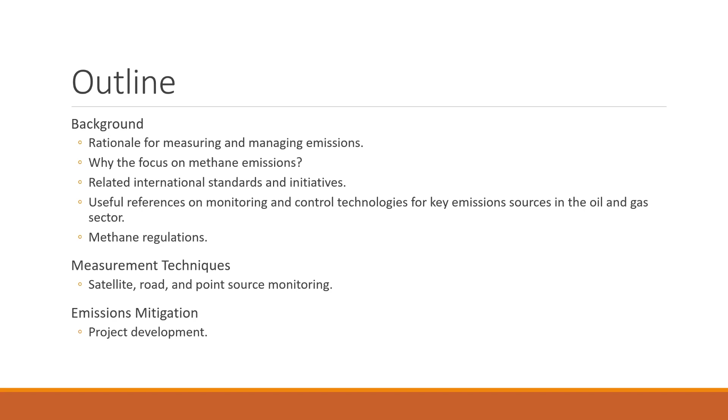So in terms of why people would want to measure and mitigate greenhouse gas emissions, I think the reasons depend on your circumstances, whether you're industry or government. Also, they depend on where you are in the evolution of trying to respond to climate change issues and the NDCs that your particular jurisdiction is committed to.

Historically, a lot of industry saw doing environmental work as being the cost of doing business. Often they simply looked at doing the regulatory minimum. But what's changing now is that the regulations are becoming more stringent, especially with respect to greenhouse gas emissions. And there's a lot more clear drivers as to why you would potentially want to go beyond doing simply the regulatory minimum.

One of the first things that at least some of the more proactive and larger companies like to understand is what are their risks. So prior to new regulations coming in, a lot of them historically have sponsored studies to look at where their emissions are occurring, what some of the opportunities might be to address those emissions, and how they see that as being a risk to their operation.

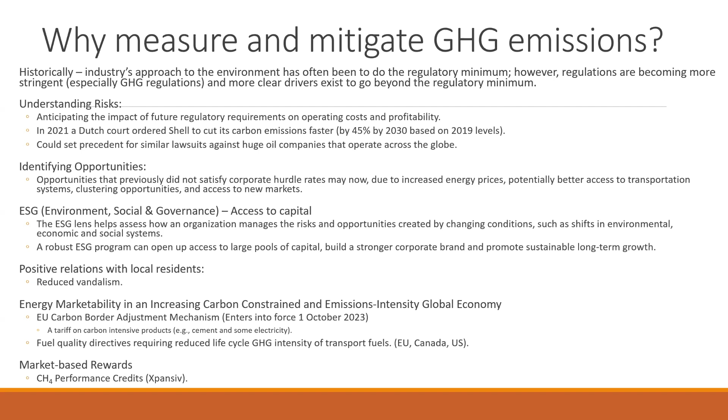Why the focus on methane? If you've been following greenhouse gas emissions, you'll see there's a huge focus on trying to reduce methane right now. It's not that CO2 reductions aren't important—anything cost effective that provides material reductions in greenhouse gas emissions, whether methane, CO2, or nitrous oxide, is important. But there's particular value in focusing on methane.

Methane is a powerful, short-lived climate pollutant. Its lifetime in the atmosphere is 12.4 years, based on the latest data published in the IPCC Fifth Assessment Report. This lifetime figure has varied over the years, and climatologists and researchers are spending a reasonable amount of time studying it. Initial values from a few years ago were more like 11 years, but now it's up to 12.4, which is why the global warming potential for methane has been increasing from assessment report to assessment report.

Methane is responsible for approximately 30% of the global temperature rise to date. While it's much less abundant in the atmosphere than CO2, on a mass basis it's 28 times more potent than CO2 over a 100-year time horizon.

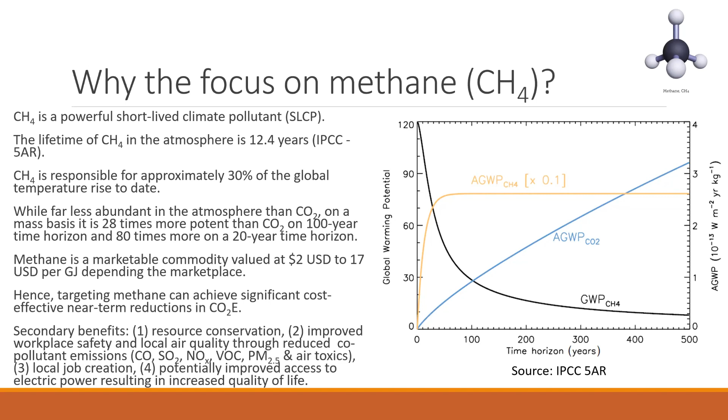So what are some of the related standards and initiatives that exist for methane? Right now, there's a strong political move to get countries to sign on to the global methane pledge. This pledge commits countries to move towards using higher tier IPCC good practice inventory methodologies, and to take voluntary actions contributing to a collective effort to reduce global methane emissions by at least 30% from 2020 levels by 2030. Reducing methane emissions from oil and gas operations is seen as among the most cost-effective and impactful actions governments can take to achieve global climate goals.

The Global Methane Pledge provides policy toolkits to the signatories. It provides access to selected technical resources, including relevant technical reports, best practice guides, and methane estimation tools. It also provides links to related initiatives such as the Global Methane Initiative, the Global Gas Flaring Reduction Partnership, and the Climate and Clean Air Coalition.

Currently, 150 countries have joined the Global Methane Pledge, including Nigeria. There are approximately 195 countries in the world, so that's 75% of jurisdictions signed up. Most of those that haven't joined are countries that don't have much of an oil and gas industry, so they don't have the same opportunities. But it's impressive that 150 countries have signed up.

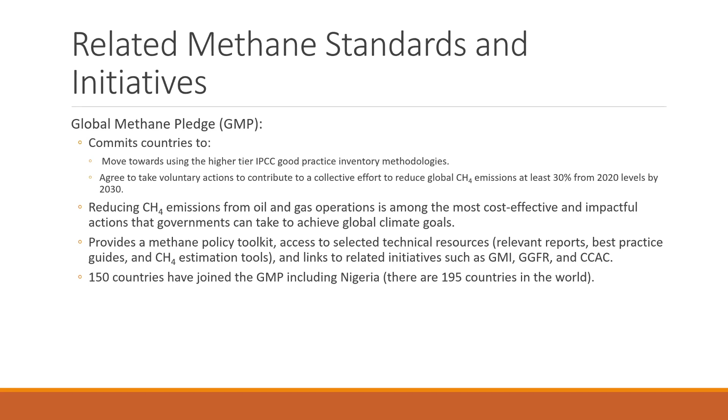Looking at international standards that might apply, the key standard for quantifying methane emissions at a project level, a company level, or a national level is ISO standard 14064. This standard has three parts.

The first part covers how to conduct a greenhouse gas inventory, how you establish your boundaries, what you include in that, and what are the direct and indirect contributors.

It also provides the procedures you would follow to establish project-based reporting of emission reductions, addressing issues like project leakage or indirect emission contributions that might occur outside of the project boundary.

It also provides a standardized process for verification of a greenhouse gas inventory. Anyone involved in developing inventories or greenhouse gas projects, or verifying these sorts of things, should have gone through some training on ISO 14064.

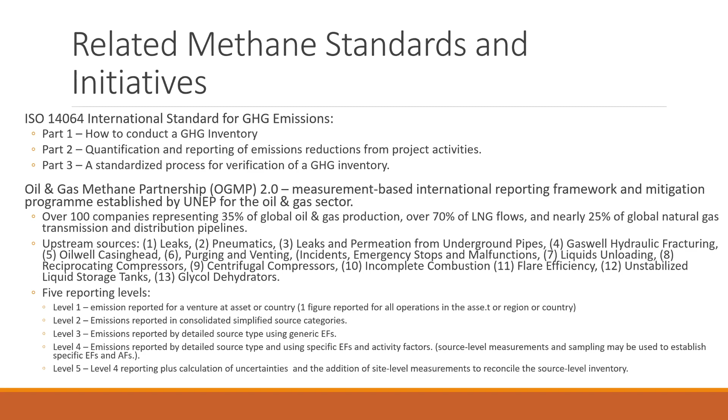It's not specific about what you need to use to do the verifying measurements, but it could be road-based monitoring, aerial surveys, or satellite-based measurements.

There's also, through the Climate and Clean Air Coalition, back in 2017, they took a lot of the information that was available from the US EPA's Gas Star program on lessons learned and successful mitigation strategies for different types of control options or emission sources in the oil and gas sector, and they put together a 9-volume series that reviewed how to measure and mitigate those emissions. They're still relevant documents.

They're still available on the website. You have to dig a little bit to find them, but I captured a screen image yesterday from the CCAC website that shows that if you put in at least the title of the report, you can find these reports on their system. As I indicated, they were all published in 2017, so if you use their filtering systems, you can eventually get access to those documents.

Other useful information, other sources that would apply that aren't accounted for in this 9-volume set, would be unit, facility, and pipeline level blowdowns that occur, and other forms of process venting, which would potentially include the release of CO2 emissions removed from produced gas using a gas sweetening unit, as Sunday discussed in his presentation.

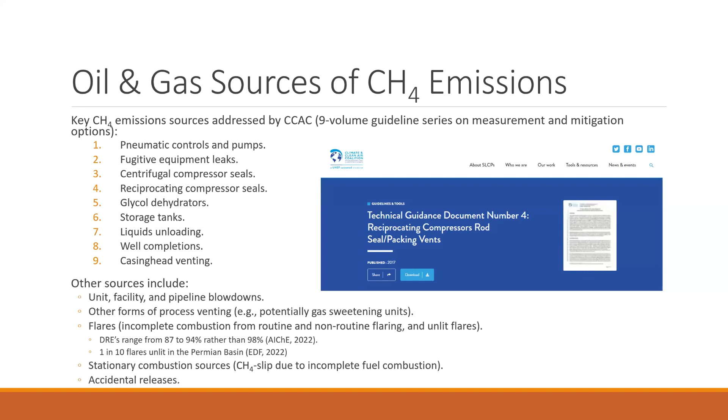Sometimes it's interesting to see what's in the public and commercial domain with respect to emissions, whether you're an operator for your facilities or a country for your jurisdiction. Currently, IEA, the International Energy Agency, has a tool called Methane Tracker. It's something you can access on the internet to see what they estimate emissions to be in any jurisdiction, focusing on methane emissions.

For Nigeria, they estimated that the methane emissions for the upstream oil and gas sector ranged between 1.83 and 4.79 megatons per year, and the contributions were mostly from venting.

As well, the GGFR provides a website that allows you to access information on active flares that exist in countries around the world. This is information they've developed from satellite monitoring and correlations used to convert the satellite data into estimated flaring rates, and that information is publicly available.

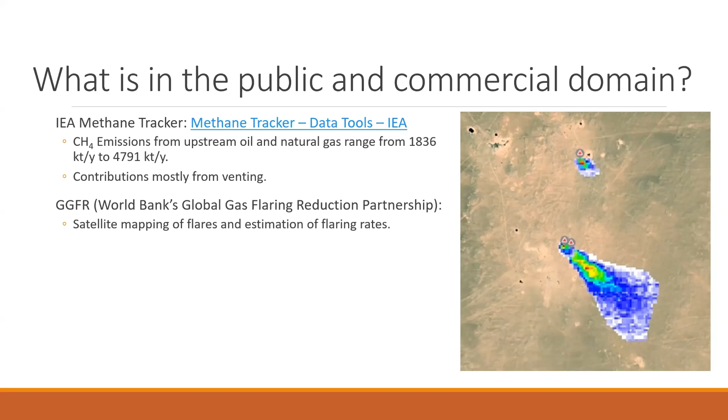If you go back to the IEA website, not only do they give you total emission estimates for jurisdictions, but they also break that down by where those emissions are coming from—what sector, and if you look at the oil and gas sector, it breaks it down even further in terms of what the sources were.

And it provides a comparison of what they're estimating versus what you're seeing in other reported inventories for a particular jurisdiction. In this case, they're comparing the emissions they've assessed to values published by the UNFCCC, which would be the National Communications by Nigeria to the UNFCCC.

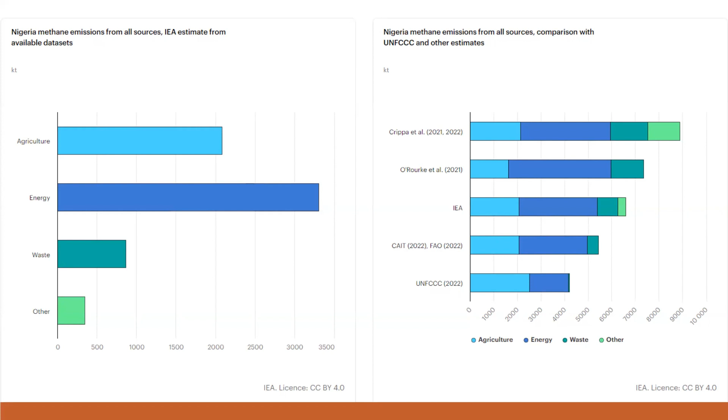It's also showing estimates developed by various research groups, and their numbers are somewhere in the middle. Our experience is quite limited because we haven't done it in a lot of countries, but where we have, my sense is that the IEA numbers, even though they're kind of middle of the road here, still tend to be conservative and understate what the emissions would typically be in a jurisdiction. But again, that's just initial observations based on a very limited data set.

And again, on the right-hand side, you see similar estimates from different groups on what those emission contributions would be, depending on whose estimates you look at.

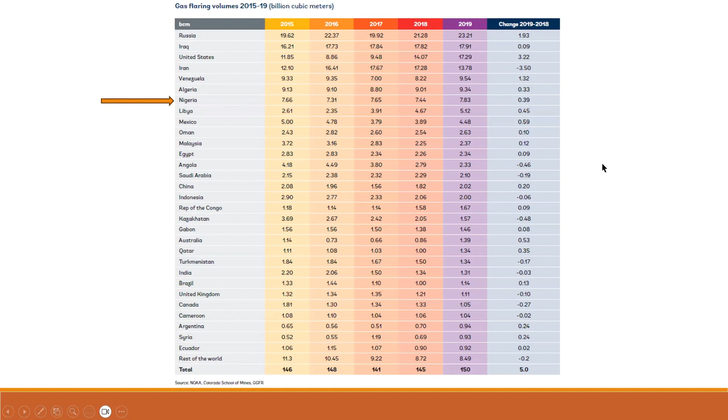IEA also provides a marginal abatement cost curve, looking at different technologies that can be applied in the oil and gas sector. These would be essentially all the technologies that the CCAC, the Global Methane Pledge, and OGMP talk about. These types of curves are really hard to look at because they're really dependent on your circumstances, what technologies are going to be cost effective for you and which ones aren't, and what the penetration potential of those technologies will be in your sector.

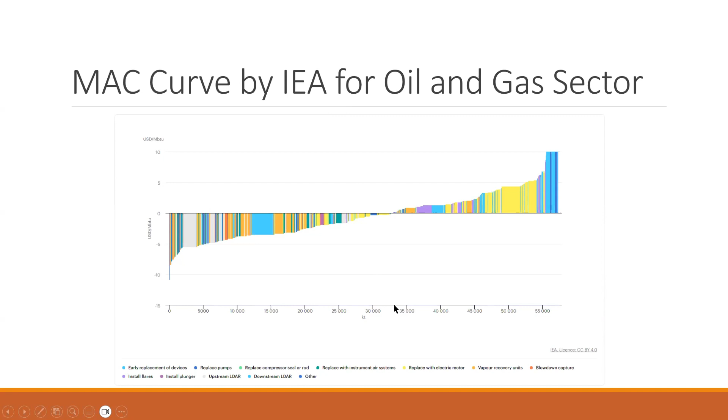But this is a generic marginal abatement cost curve that is intended to reflect what they believe is the global circumstance. It shows that there are a reasonable number of opportunities that, if they've got a negative value, are cost effective to implement, so you can get quite a large reduction in emissions by simply doing what is cost effective or has zero cost to reduce those emissions. That would be basically taking you to here. If you come down, that would give you a 30 megaton reduction in methane emissions.

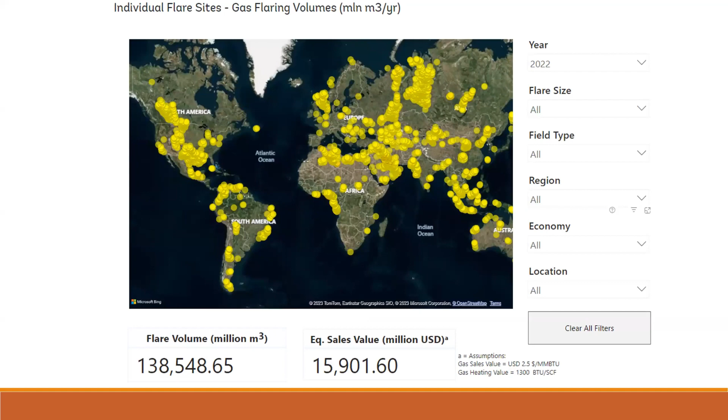This is the kind of data that's available from the World Bank's GGFR, showing the location of flares around the world, and you can zoom in on a particular territory. So I've done that for Nigeria. Here you can see where they're showing flares, some of them offshore, some of them onshore, and you can actually get a listing of the emission rates or the flaring rates for each of these flares from their website as well.

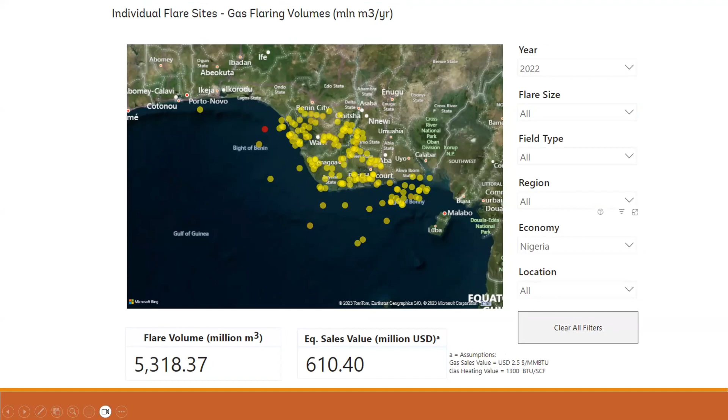Methane regulations.

The methane regulations in Canada, as I mentioned earlier, are currently, I think, the only set of regulations that have been fully put into force, and are what would probably be deemed fairly onerous requirements for industry. They're targeting to achieve a 40 to 45% reduction in methane emissions from the oil and gas sector in Canada relative to 2012 levels by the year 2025. Those requirements first came into effect in January of 2020 and have been phased in since then, with the last remaining requirements becoming effective January 1st of this year.

Based on what they're seeing in terms of how industries have responded to this, and the reductions that they're able to verify are occurring, they're wanting to further reduce those, or implement even more stringent requirements. So sometime this year they're coming out with a draft set of regulations, and those new regulations are expected to target a 75% reduction below 2012 values by the year 2030.

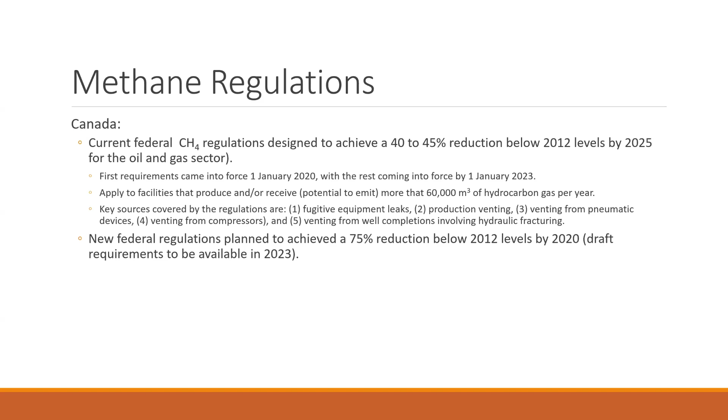Anyways, I will show you what those requirements actually look like. For fugitive equipment leaks, they're requiring that companies do an LDAR survey at their facilities 3 times a year. You might ask, why 3 times, why not just quarterly? The reason is that in Canada during the wintertime, with the cold temperatures, it's hard to use some of the leak detection equipment. It just simply doesn't perform that well. You need good contrast, and if you're using optical gas imaging cameras, which most people are using these days, they simply don't work that well in the wintertime.

So you don't get good detection capabilities, and some of the facilities are actually harder to access in the wintertime than they would be in the summertime.

Interestingly, I see some of the same issues in tropical environments. There's usually a rainy season with a lot of cloud cover and rainy days, and during that time it's equally challenging if you're using an OGI camera. They need proper contrast; the best time to use them is on a bright sunny day, and without that it can be very difficult to see leaks.

I've used a camera in those types of circumstances, and it's quite dramatic. You can be walking around a piece of equipment and not see anything, and then suddenly there's something in the background that provides that contrast. For a very short part of your circling of that source, there's a place where you can actually see the emissions. Otherwise, you're totally blind to it.

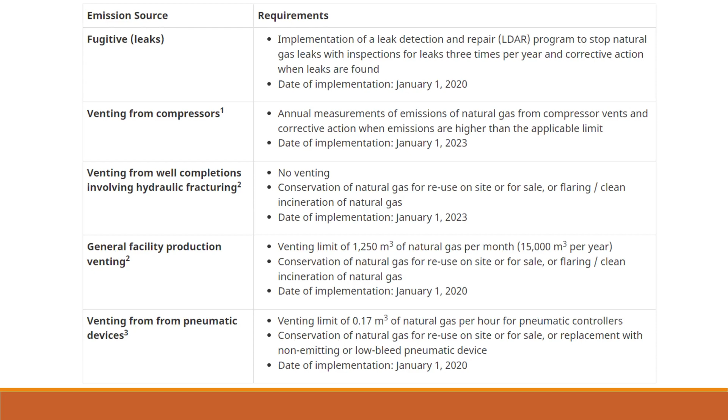There are also requirements to limit venting from pneumatic devices. They've got a limit of 0.17 cubic meters of natural gas per hour for pneumatic controllers. A lot of companies have converted their pneumatic controllers from high bleed to low bleed or no bleed, or else put in air compressors to provide compressed air as a supply medium instead of using natural gas.

Measurement techniques. This basically summarizes the types of approaches that can be used. Point source measurements are where you go in and directly perform a measurement on the source. This is useful information because ultimately, to address an opportunity, you need to understand what the cause is and what the actual emissions from that source are, to drive potential economics on it.

Aerial surveys can be done to help identify high emitting facilities where you might want to target your efforts, but they can also be used to zero in on hotspots at a particular facility if it's a larger site. These can be time consuming and expensive to conduct. A road survey is where you have a vehicle mounted monitoring system; you drive downwind of the facility and use that information to get a snapshot of what the emissions need to be.

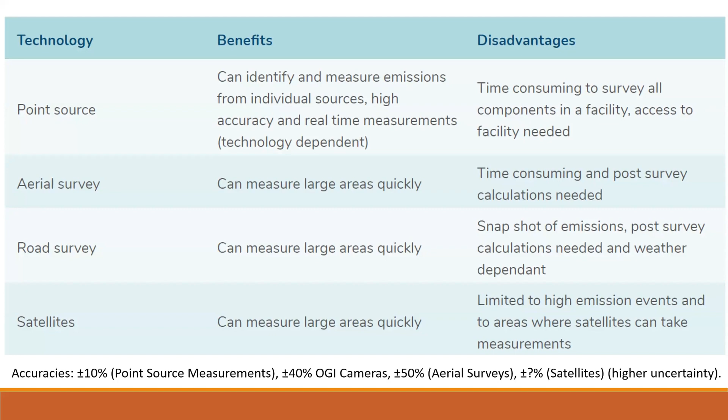In terms of satellite monitoring, there are methane-specific satellites that can track methane on a global scale but can't detect small-scale sources, which are responsible for a lot of total methane emissions from the oil and gas sector. Others can provide excellent data for known sites but can't see beyond small areas. Existing satellites don't provide measurements over equatorial regions or northern areas, or are very challenged, at least for offshore operations, and are affected by cloud cover.

Sentinel-5P is a methane satellite launched by the European Space Agency. It has a resolution of 5 kilometers by 7 kilometers. The data are publicly available - you can download it and graph it to look at where hotspots are across the country.

GHGSat offers a resolution of 50 meters by 50 meters, much more resolved. The Italian space agency launched a satellite with even better resolution, 30 meters by 30 meters. NASA has a GeoCarb satellite that tracks sources and movements of methane around the globe. The Environmental Defense Fund is proposing to launch a satellite in early 2024, which it says will be state of the art at the time it goes up, and will be able to identify and quantify emissions from sources larger than 500 kilograms per hour.

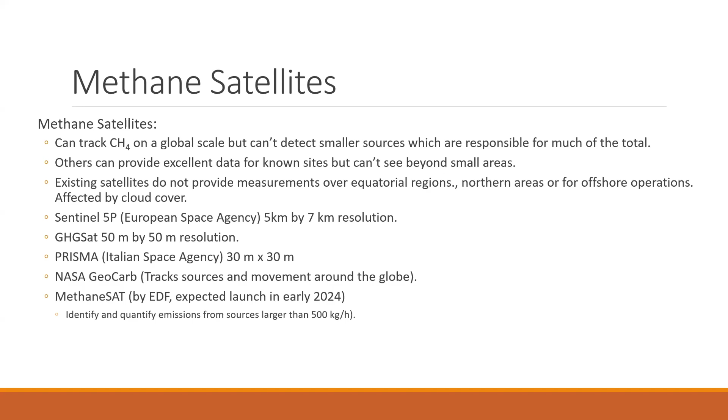The primary capabilities are the ability to detect and quantify methane emissions from point, line, area, and volume sources. Based on controlled releases we've done, it works quite well with reasonable wind conditions. We're seeing accuracies typically in the range of plus or minus 25% under stable wind conditions and speeds of 2 meters per second or greater. If the wind meanders, it affects your ability to properly geolocate the origin of the source, and if you get gusting winds, it affects your ability to get accurate quantification of that emission rate.

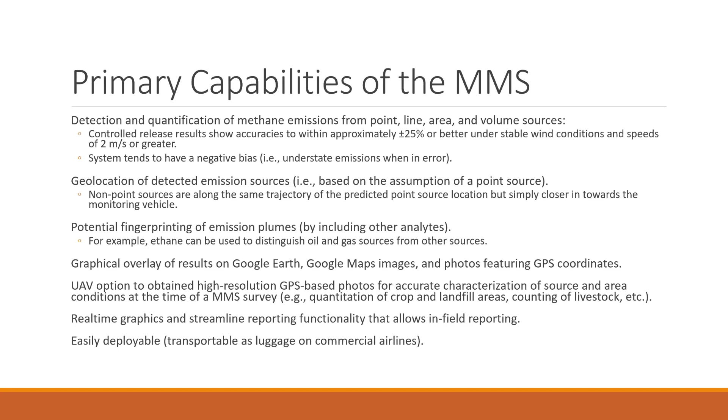And it provides real-time graphics and streamline reporting that allow you to do reporting in the field, and it's easily deployable. Everything breaks down into several cases of luggage that can be taken on a commercial airline and flown to different parts of the country or to different parts of the world.

The advantages are that it provides real-time monitoring and in-field data analysis. It's able to cost effectively and quickly screen many facilities or sources and rank order them based on their assessed emissions. It detects emissions that on-site screening methods miss.

In a recent study, we worked in parallel with a team that went on site and did direct measurements using optical gas imaging cameras to detect leaks. What we found was the best strategy was to screen the facility first with the mobile monitoring system to identify the hotspots, and then send the teams in armed with the knowledge of where the sources appear to be located, so they could pinpoint the source, determine exactly what it was, and do their direct measurements on it where that was possible.

It also had the advantage that it was able to quantify emissions from sources that the camera and direct measurement techniques simply couldn't quantify. So we didn't miss anything - we always had complete quantification of the emissions from a facility.

As well, it ties in nicely with the OGMP 2.0 level 5 methane reporting verifications. It actually provides comparable, or in some cases even better, sensitivity than other methods can - certainly better sensitivity than aerial techniques would. But even with the OGI camera, there were cases where we could see emissions that the camera couldn't see using its viewing capabilities.

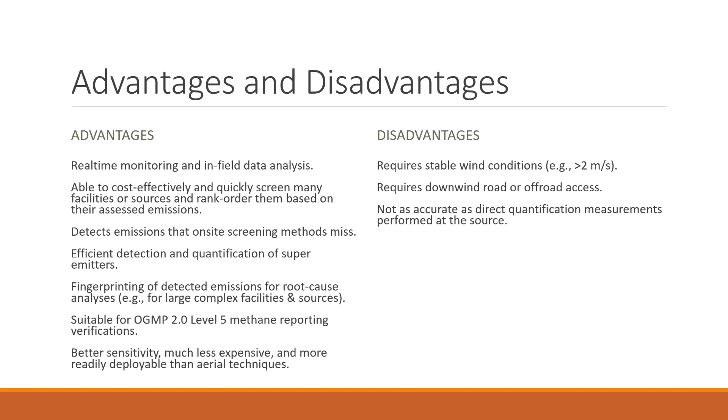The disadvantages are, of course, we need wind, and not just wind but stable wind conditions to get good results. But even with results that suffer from uncertainties because of gusting, we still have the ability to help pinpoint where the emissions are and determine where the hotspots are, which helps guide the ground teams that would be used. It's not as accurate as direct measurement techniques, and it does require drivable downwind terrain - it doesn't necessarily have to be a road, but it needs to be at least firm ground that you can drive on, allowing you to get on the downwind side of the facility.

The types of sectors we've targeted using the monitoring system have included oil and gas facilities, both upstream and some fairly large gas processing and LNG facilities. We've also looked at refineries and petrochemical facilities. We've used it in urban areas to identify leakage from gas distribution systems, and driven through light industrial and commercial areas to identify leakages there.

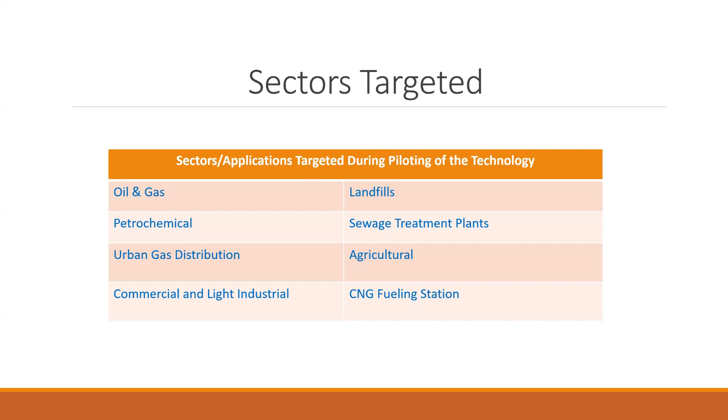We've used it to quantify emissions from landfills, sewage treatment plants, even agricultural applications looking at enteric emissions from livestock. We haven't had an application yet to use it on something like rice paddies or crops that would be methane intensive, but we're in discussions with Agriculture Canada to do that kind of testing. We've also used it to quantify methane emissions from CNG fueling stations.

What typically are the biggest opportunities that we see? Certainly in North America, where there's been regulations to try and deal with things like routine venting, we're seeing large amounts of emissions tends to be from flares, especially unlit flares, but also venting of flash gas from production storage tanks - both produced oil tanks and produced water storage tanks. The water tanks have some hydrocarbon carryover that promotes or is a source of flashing that can be material, especially where you've got large amounts of produced water. And fugitive equipment leaks still remain a fairly noteworthy source and continue to be an area worth targeting.

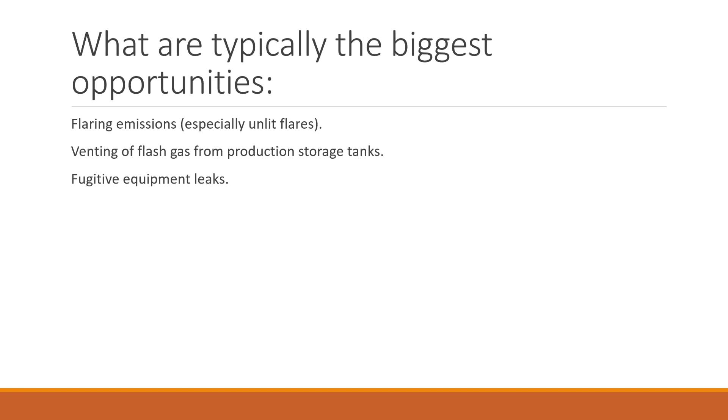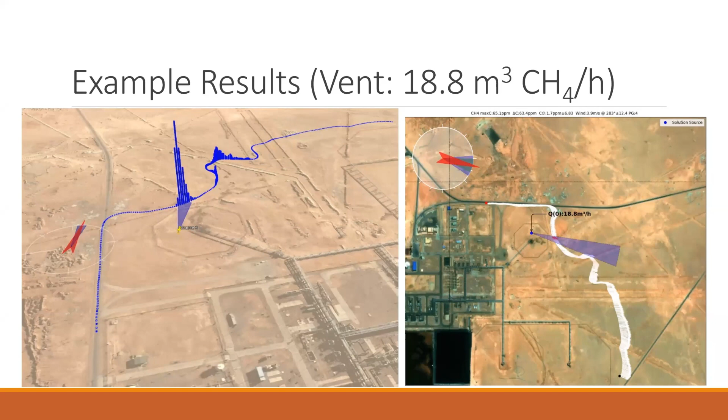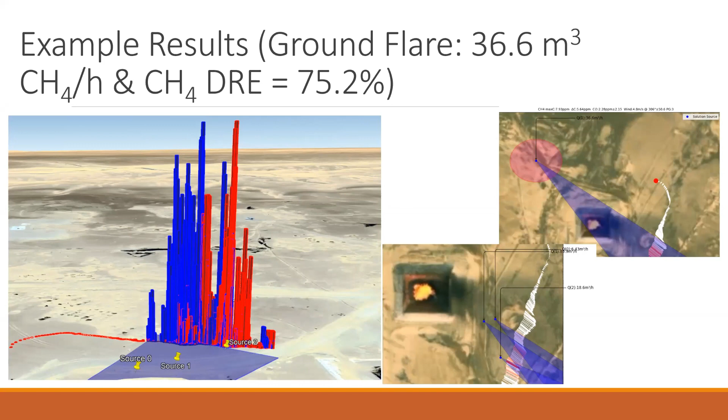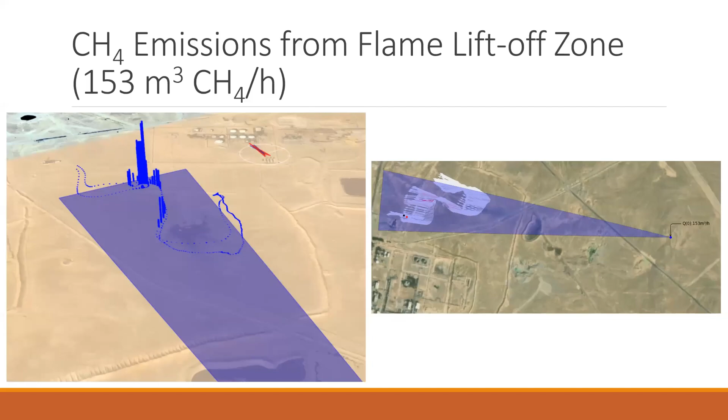Point source measurements - most of these are really directed at fugitive equipment leaks.

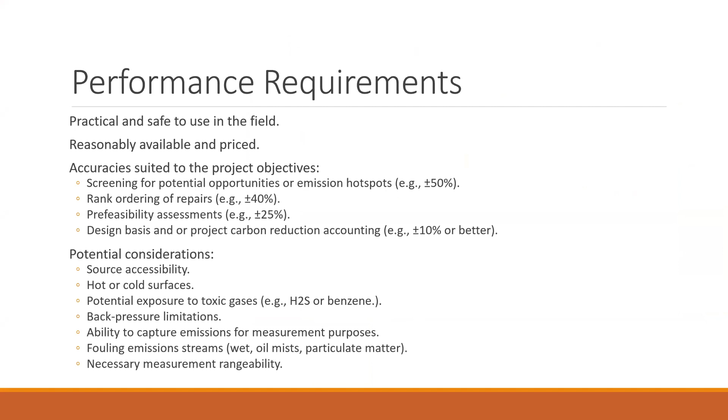I know I'm running out of time here, so I'm going to skip over some of the detail and just show you the basic technique. Method 21 does allow you to use soap solutions or the bubble test to detect leaks, and it even suggests a means where, based on the rate of bubble formation and the size of the bubbles, you can quantify the leak rate. Method 21 is an approach developed by the US EPA, originally for application at refineries and chemical plants to detect VOC leakage, but it's also used for detecting methane leakage at upstream oil and gas facilities.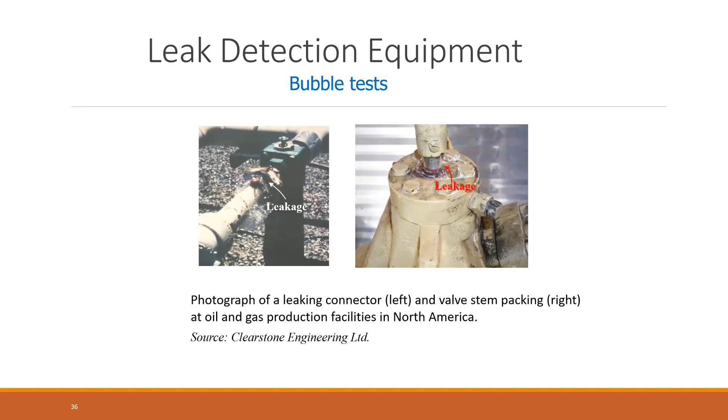And it's the most labor intensive. It involves someone going around and actually checking each individual component to look for leakage. So if you spray it with the soap solution and it bubbles, then you know there's a leak. If it doesn't, then there isn't a leak.

There's also the ability to use a handheld gas detector to do the same measurements. Here you take your probe and pass it over the potential leakage points, and there's a specific procedure in method 21 that tells you how to use that. And you record a ppm reading, and a lot of the regulations that define what is a leak from a regulatory perspective define it in terms of a ppm screening value.

It's a crude indicator of leakage, but it's a method that can be used to survey components and find out which ones are leaking, and obtain an objective decision as to whether or not it needs to be tagged and repaired, or whether it doesn't. So not all components that show measurable VOC readings, or in this case methane readings using your portable gas detector, need to be repaired. They only need to be repaired if they have ppm readings over a certain value. And typically these days that value is 500 ppm.

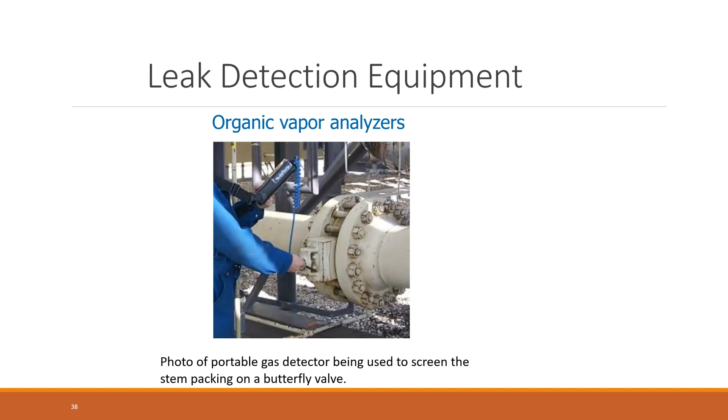The OGI cameras have the advantage that they're easier to use. You're not having to get as close to the individual components. You don't have to record data. The procedure there is, if you see leakage from the component, then you need to tag it and repair it. If you don't see leakage with the camera, then of course there's no indication of leakage. It's not a leaker, and you don't repair it. That doesn't mean there wasn't some nominal amount of emissions occurring. It just wasn't detectable by the camera.

So when people are actually reporting out their emissions, they typically report two things. They report the contribution that they actually detected and measured from sources defined as being leakers, and they would do a calculation to estimate what the emissions from what are termed non-leakers would be. The sum of those two would be your total emissions for a facility. The reason people do that is so that you don't show zero emissions for any of your facilities, because optically that's difficult for a lot of stakeholders to believe, and in theory isn't really possible. There's no such thing as 100% effective seal or mechanical coupling. You potentially have some level of emissions. It's just a matter of what the detection capabilities of your leak detection method was, and what the regulatory leak definition is that you're applying.

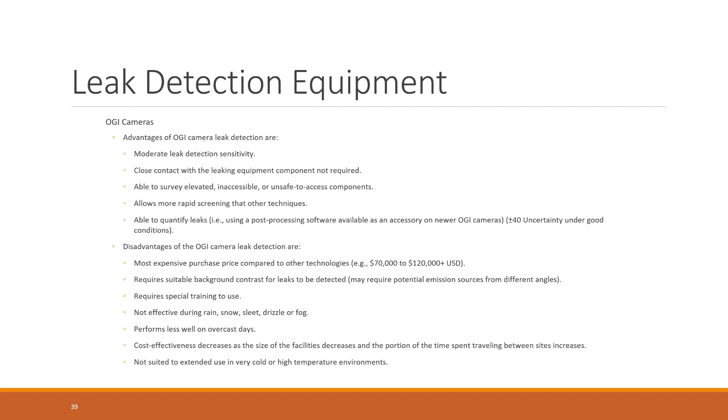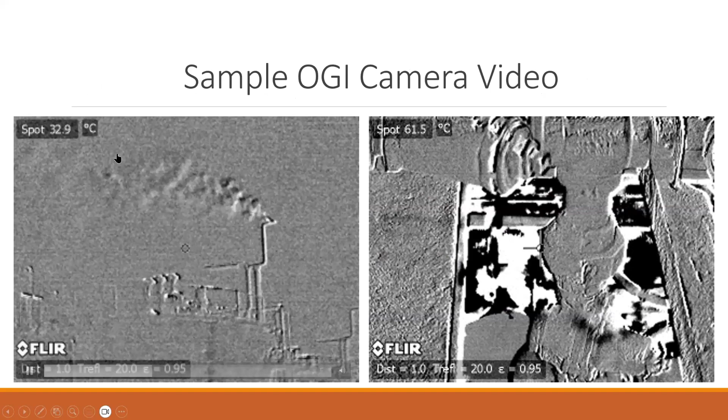If you have not seen the images from an IR camera, this is what you would see when you're looking through the screen, depending on the mode you've put it into. This is showing emissions coming from a storage tank. It doesn't see methane specifically, it sees hydrocarbons. So when you see a plume like this, it could be all methane, or it could be very low methane contributions and very high emissions of non-methane hydrocarbons. That's what you would see if you simply looked at it with your naked eye or with a digital camera.

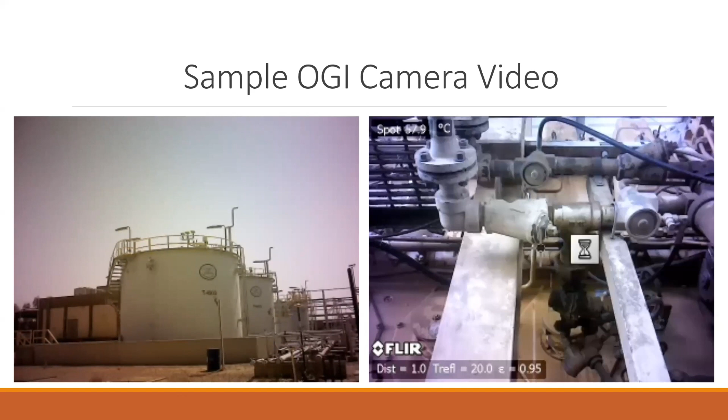This was just emissions coming off a smaller component, but same idea. Here it's leaking from a threaded connection. So you can see small sources, you can see larger sources, you can see them close up. The farther away you are from a source, the worse your detection capability would be.

In terms of leak rate measurement equipment, one of the most common pieces used is called a high flow sampler. Here, a high flow sampler is being used to measure emissions from a seal vent at a compressor station. What's being done here is an extension pole is used to reach flexible hose up into the seal vent, and the actual high flow sampler is what the second person is holding on the railing there. It basically has an induced draft system, like a vacuum cleaner. In theory, it's capturing all the leakage coming from a source. If it's a vent like this, it's a little bit easier to do.

If it's a valve, you need to position it so that you're capturing some air from around the valve, but the intent is that you capture all of the vapors or gases that are being emitted from that valve. So as long as you're getting 100% capture, then your results are accurate.

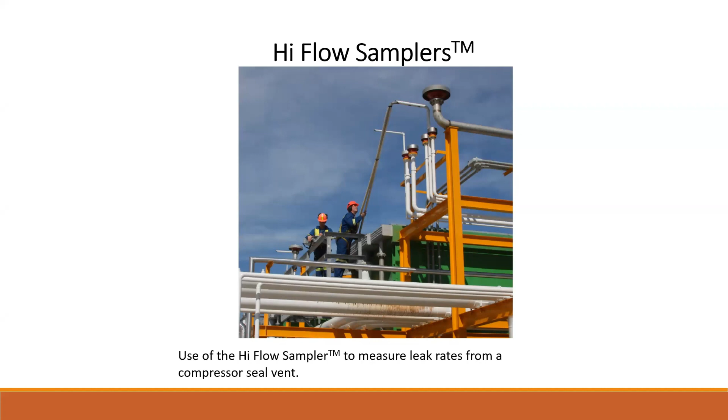What the device does is it measures the sampling rate and the concentration of hydrocarbons in that stream, and then the product of that is your actual emission rate.

If you're looking at emissions from a pipe or an open-ended line, sometimes you can use a velocity probe to do a measurement. The EPA Method 1A establishes a procedure for doing that, where it defines specific points at which you would perform a measurement.

All of these instruments need to be intrinsically safe to be able to use in a hazardous location. There's not a lot of vane anemometers, which is what this is, that can be used in a hazardous location, but there are two vendors of that type of technology that have probes that are handheld anemometers that can be used in hazardous locations.

This other device is a thermal dispersion anemometer. If you've got a port available on a flare line, for example, you could potentially use this to do measurements.

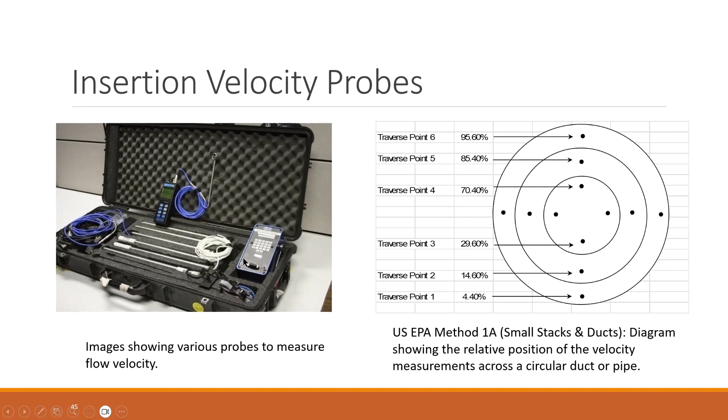Storage tanks can be very challenging to measure the emissions from. The biggest challenge is getting access to the roof.

Here we're using a vortex gas flow meter. We were using it for two reasons: one, it had a reasonable operating range that covered off what we needed for a typical tank venting application, and it was completely intrinsically safe, or rated for use in hazardous locations. So everything from the handheld device to the cabling and the actual probe that's wetted to the gas stream was all suited for a hazardous location.

So what it's doing is measuring a velocity in the pipe, and based on the diameter of this flow cell, it's capturing or determining what the flow rate is. You can't see it, but inside is a flow straightener that's being used to straighten the flow before it goes past the velocity probe, to ensure that we got a fully developed flow profile to get improved accuracy in the measurements.

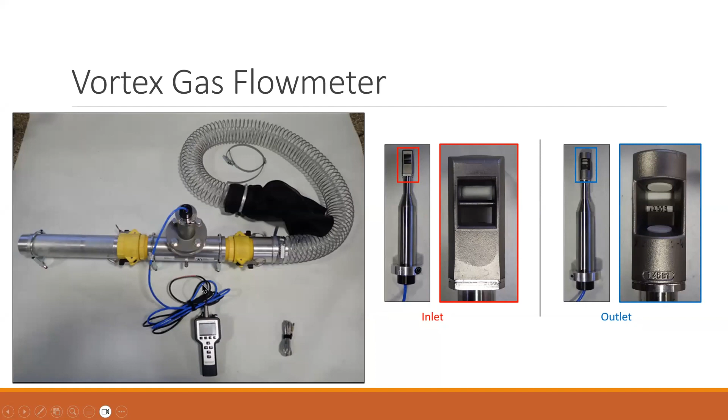This is a vortex gas flow meter that we've been using on wellhead casing vents. The advantage here is these have very high operating ranges. The turndown ratio is typically 2,000 to 1.

It's often very accurate. It's tolerant of there being some particulate matter or some aerosols present in the gas stream. Fairly robust. The only challenge is that it needs to be wetted to the gas stream, which is why we have this flow cell to do that. And again, there's a flow straightener in the upstream section before it goes through that cell.

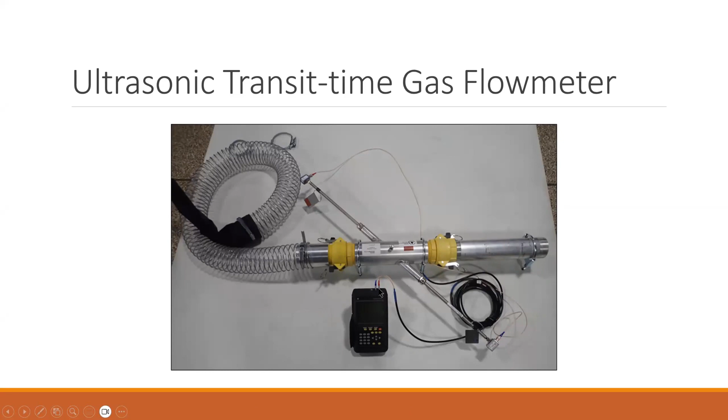The disadvantage of this one was that this part of it wasn't rated for use in a hazardous location. Everything else was, but this wasn't. When we use it, we typically put an extra run of tubing on the end to get the emissions to a safe location. We would be using it in areas, for example, if you're doing it on a wellhead, we would be far enough away that we wouldn't be violating any hazardous area location classifications.

Combustion testing to measure a methane slip. Typically, we've been using cavity ring down spectrometers specific to measuring methane emissions, and as well when we're doing a normal combustion test, also using cavity ring down spectrometers, measuring carbon monoxide, carbon dioxide, oxygen levels, and moisture levels in the different gas streams.

Knowing that information, you can develop an emission factor. If you develop an emission factor and you know the fuel gas consumption rate, then you can determine what the emission rate for that source is.

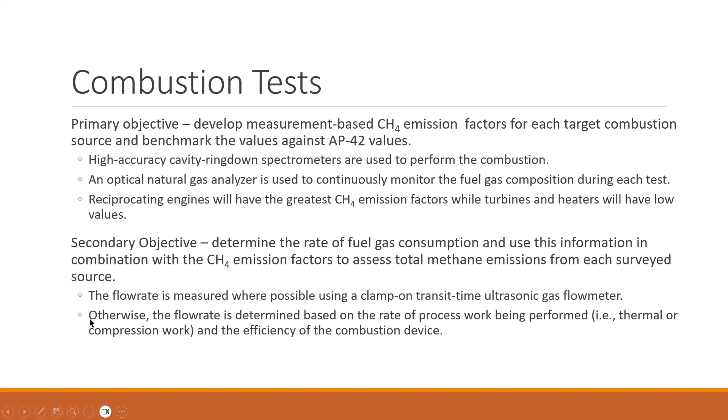Sometimes you can measure that flow rate using clamp-on ultrasonic flow meters. Other times you need to look at the amount of process work the associated device is performing, whether that's thermal work by a heater, compression work by a compressor, or pumping work by a pump. Knowing what work is being done to the process, and knowing typical efficiencies for that type of device, you can back calculate what fuel would have been required by the combustion device to meet those requirements.

This is a case where it's not a matter of going in and getting a spot measurement of the emissions. Here we were looking at flaring rates, using an inline tracer technique to measure the instantaneous flare rate. When we designed the solution, we looked at the variability in that flow rate and what could be done to smooth it out. Understanding how the flow behaves is an important input parameter to your design analysis, and knowing the composition of the stream was also important.

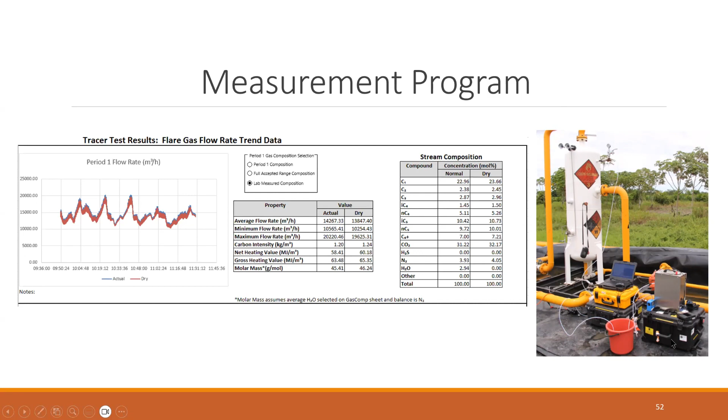The types of mitigation technologies depend on what you're looking at, but for stranded gas applications or waste gas recovery opportunities, conventional options include gas conservation schemes where you collect the gas and tie it into a gas gathering system, displacement of energy purchases by using the gas to run or power equipment, producing electricity, and potentially generating electricity for offsite sales.

Small scale gas to liquids applications are something a lot of people have been looking at, and there are pilot cases where the technology is being applied. Larger scale LNG is an option, but that requires much larger volumes of gas to be appropriate. There could be hybrid solutions where, for example, you try to recover condensable hydrocarbons from a waste gas stream, and use what's left to generate electric power to drive the process or extraction process, and possibly other needs on site, with the remainder sold into the grid.

If you are recovering condensable hydrocarbons, the options for getting that to market are: you could blend it into weathered or stabilized crude oil at the site, as long as you do it in a managed manner, don't exceed RVP limits, and avoid significant evaporation losses. Or you can sell it as a separate product — as a high vapor pressure product, or fractionate it and sell it as propane and butanes. Possibly you can use virtual pipelines, compress the gas, get it to local markets, and sell it as a CNG product.

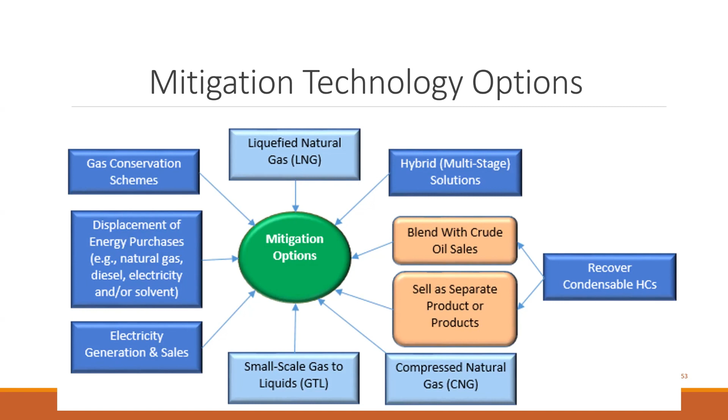This is the thought process that goes through a typical mitigation project. You look at what production changes are expected over time, allowing for production decline. You do energy balances to determine how much of the waste gas stream is needed to drive any processing elements, look at the associated emissions, and do your economic analysis to determine net present value, factoring in implications of carbon taxes, royalties, inflation, discount rates, and income tax.

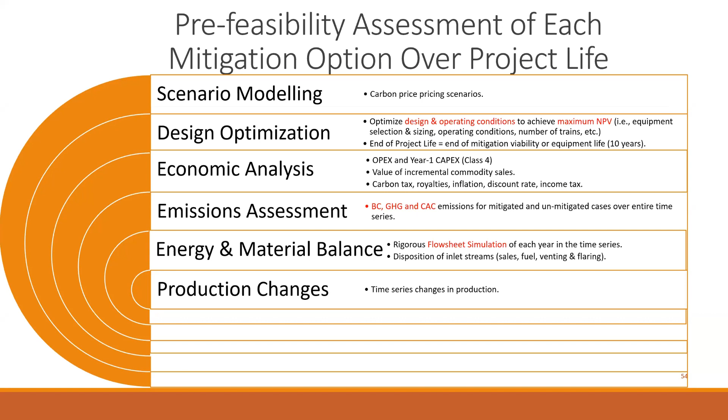When designing it, you consider the turndown requirements as facility activity levels decline — how many trains would you put in to achieve the turndowns you want? If you put in multiple trains, it becomes more expensive. So what is the optimum balance between extracting as much value from the project as you can without too much capital expenditure, and then possibly looking at different carbon pricing scenarios to see how that impacts your overall economics?

When you do that, you wind up with a summary where you can identify your capital costs, potential paybacks, net present value — do you have enough profitable years to pay back your initial capital investment? Your return on investment expressed as a before and after tax rate of return, or as an internal rate of return. So those are the basic things that go into an economic analysis.